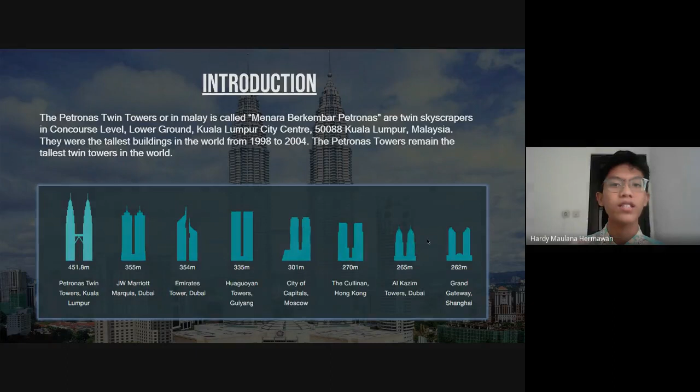Okay, next, milestone. The Petronas Tower started project planning in January 1992. Then in March 93, start of foundation work, and in April 94, construction of the superstructure. Fitting out the interiors complete with furniture in January 96, and in March 96, taking off the spires of Tower 1 and Tower 2.

January 97, moving in the first batch of Petronas personnel, and then the last, August 99, official opening by Dr. Mahathir Mohamad as Perdana Menteri of Malaysia.

Okay, for building Petronas Tower, many persons and many parts are included here. Companies involved, especially owner or developer KLCC Property Holdings Berhad, architect Cesar Pelli and Associates, structural engineer Thornton Tomasetti, MEP engineer WSP Flack and Kurtz, project manager Landis, main contractor Hazama Corporation for Tower 1 and Samsung Engineering for Tower 2, and many others like consultants, facade maintenance, fire and wind, then material supplier, construction hoist, elevator, facade maintenance equipment, paint or coating, sealants and steel.

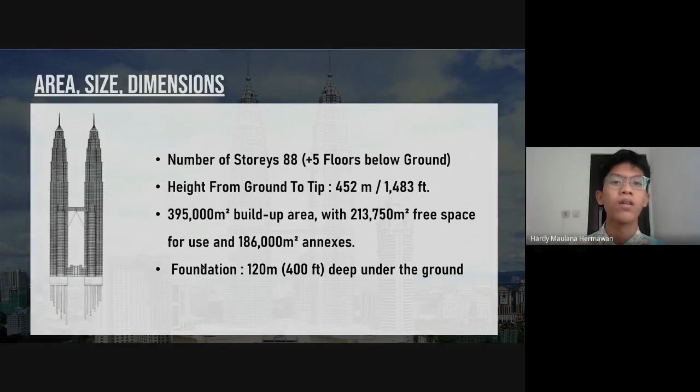Okay, next, why do we choose Petronas Twin Towers? The first reason is because the Petronas Twin Towers were once the tallest buildings in the world, from 98 to 2004, located in Southeast Asia, where most existing countries are developing countries. The reason number two is Petronas Towers have different contractors between Tower 1 and Tower 2.

Okay, next, for the structural system of Petronas Twin Towers, it will be presented by my partner, Garil Edo Hermans.

Okay, firstly, I will explain about the foundation structure. The geotechnical survey discovered that the actual construction site was situated partially over decayed limestone deposition and rest over soft rock. After discovering this, the structure was relocated to avoid the limestone deposition.

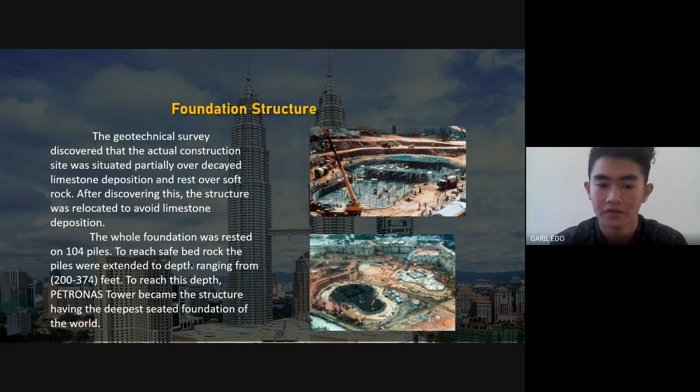The whole foundation was rested on 104 piles. To reach safe bedrock, the piles were extended to depths ranging from 200 to 374 feet. To reach this depth, Petronas Tower became the structure having the deepest foundation in the world.

And next, about foundation structure, in the picture we can see the foundation plan and foundation issue. The piles were embedded by a thick raft. This raft was 15 feet in depth and required an enormous amount of concrete to cast it.

This is about 4,470,000 cubic feet, which was the largest continuously poured concrete until 2007. This huge quantity of concreting for each tower required 54 hours to pour. Okay, next.

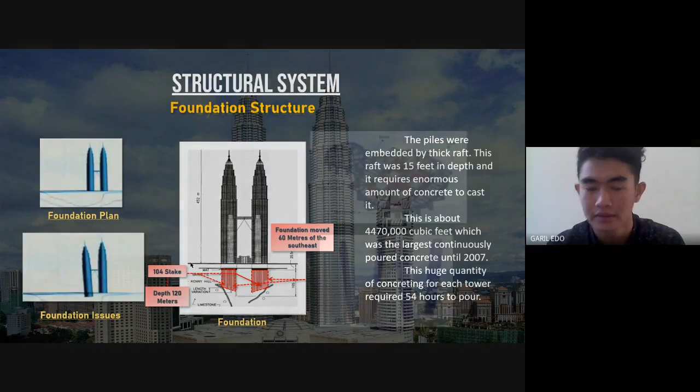The structural system of each tower comprises a 25 meter central core and an outer ring of widely spaced 16 cylindrical super columns. Beside the text we can see the picture: first we see the beam, bustle column, and underneath the main column and core.

The 16 cylindrical columns are constructed using high-strength reinforced concrete. These columns are linked by ring beams to build a moment frame tube. This is a good example of the tube-in-tube system, as there are a pair of tubes. The second image represents the tube-in-tube structure system for Petronas Tower, with the inner core and the outer tube shown separately.

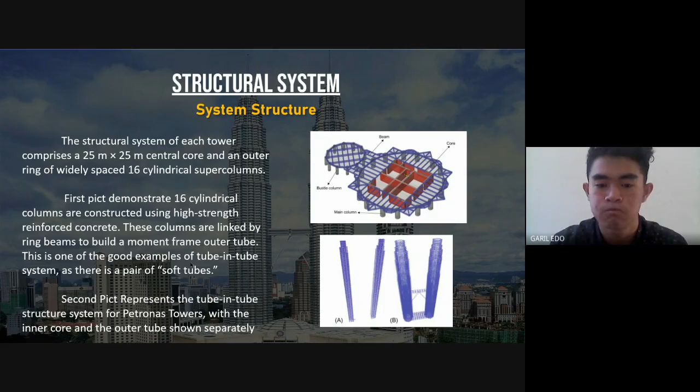Next, this is about the wall structure. You can see in the picture the reinforced concrete, aluminum composite panel, glass facade, and Rub Al-Hizb.

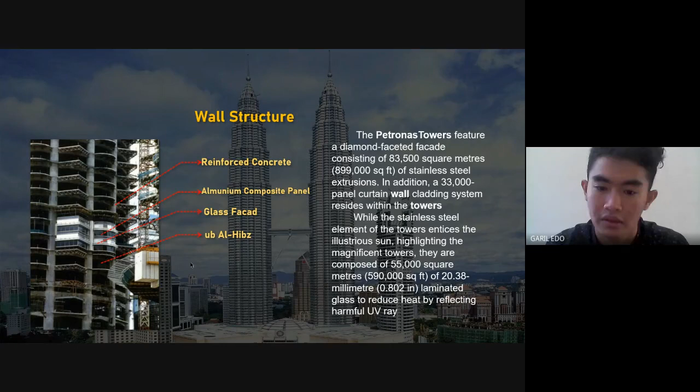The Petronas Towers feature a diamond facade consisting of 83,500 square meters of stainless steel extrusions. In addition, a 33,000 panel curtain wall cladding system resides within the tower, while the stainless steel elements of the tower entice the illustrious sun, highlighting the magnificent tower. They are composed of 55,000 square meters of 20.38 millimeters, or 0.802 inch, laminated glass to reduce heat by reflecting harmful UV rays.

We can also see the wall structure, the foundation Rub Al-Hizb, and then the additional shape combination shape. We can see the combination shape from gravity loads. Geometry is used as the main concept of the structural and design of the Petronas Twin Tower.

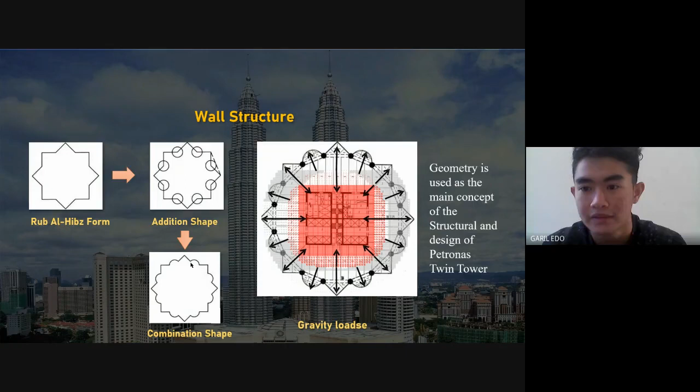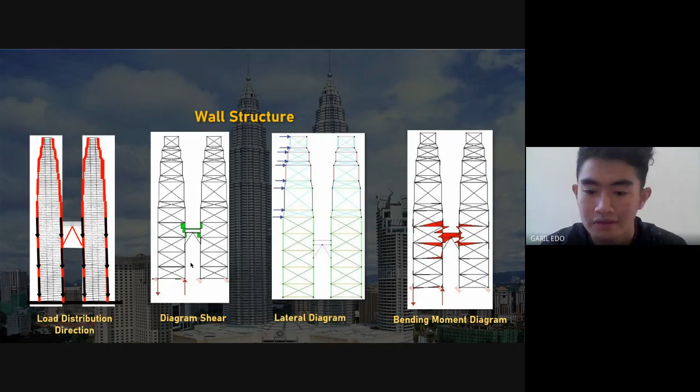At the sky bridge, the structural system is a double deck bridge spanning 58.4 meters, connected to the towers at the Sky Lobby Elevators Transfer Station. It is set on floors 41 and 42, allowing easy circulation by people in the upper tower floors, minimizing lift usage, reducing fire exit requirements, and given its height and span, requires steel for lightweight and easy construction.

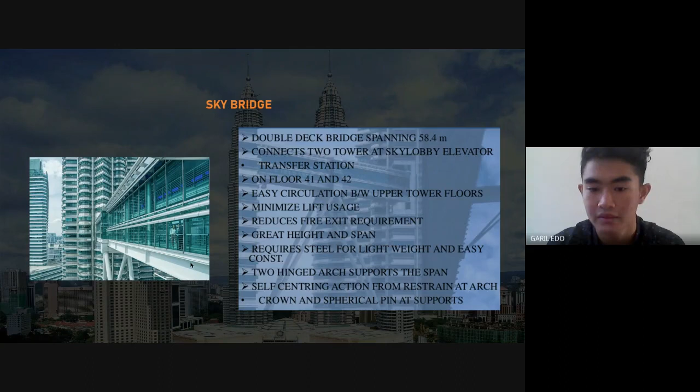At the center we can see the bearing tube, and at the foot a bright red 63-degree tilt, and at the very bottom of the foot, two steel tubes, located at floors 28 until 29.

The sky bridge connecting the two towers uses a combination of rectangle and triangle structures to add strength and stability to the bridge.

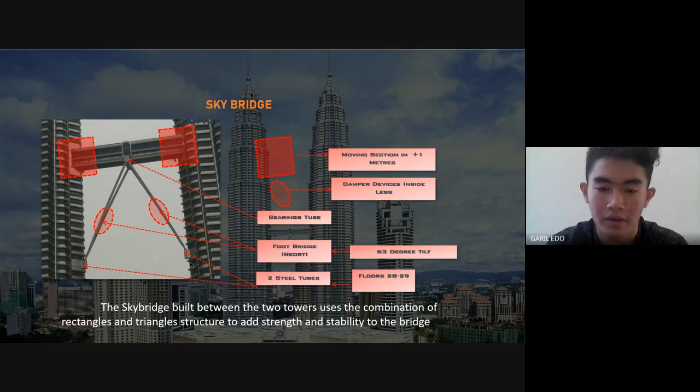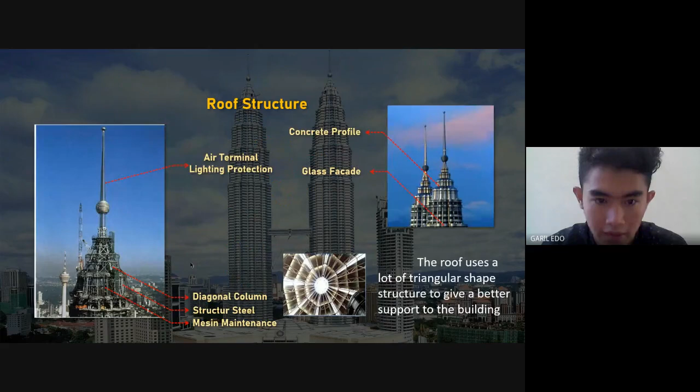Next, on the roof structure, at the pinnacle structure, the upper part of the Petronas Twin Towers, we can see first the air terminal lighting protection, then the diagonal column structured steel, and machine maintenance. In the second image: concrete profile, glass facade, and the roof uses a lot of triangular shaped structure to give better support to the building.

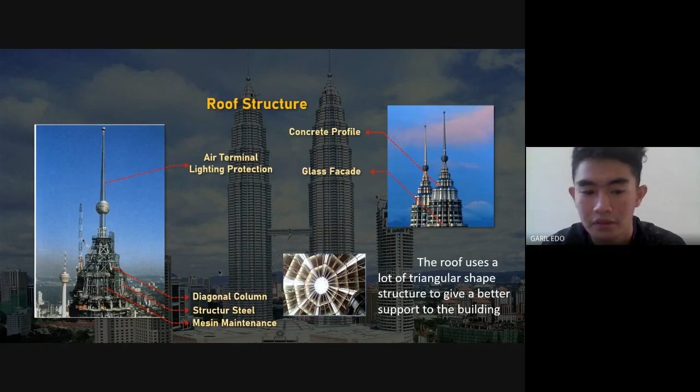Next, in the pinnacle structure analyzing and modeling: first, 3D modeling using SAP90; second, including perimeter beams, columns, central columns representing the core and outrigger system; and third, column cross section properties use compressive stresses dominant, elastic moduli E values varied with strength according to ACI 318, and the E value is not reduced for creep short term.

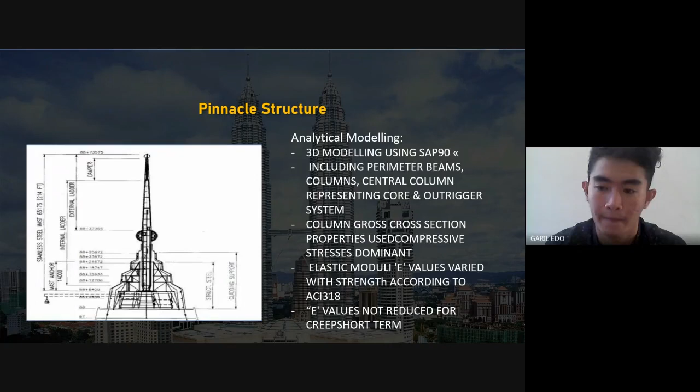Next, I will continue with project 3. My title is Substructure of the Petronas Twin Tower.

First, about soil and bedrock conditions. A generalized soil and bedrock profile below the tower is shown in Figure 1. The geological profile consists of 12 to 20 meters of medium-dense, silty and clay alluvial sand. The alluvium is underlain by medium-dense to extremely dense, sandy and gravelly silt and clay materials.

This residual soil and weathered rock deposit now locally forms the Kenny Hill Formation. The bedrock below the Kenny Hill is of Silurian age and consists mainly of calcitic and dolomitic limestone and marble. The rock surface is very irregular and has been weathered by solution activity, creating numerous joints and cavities.

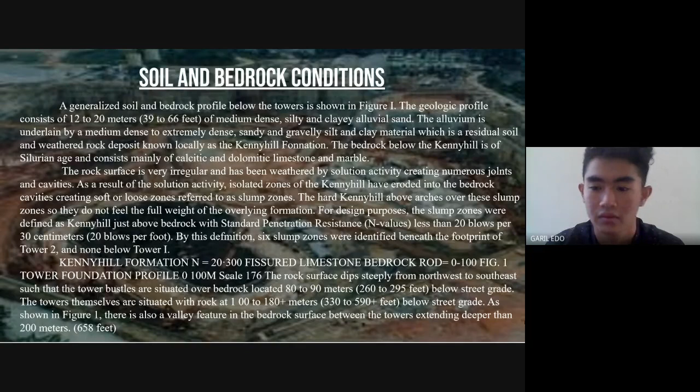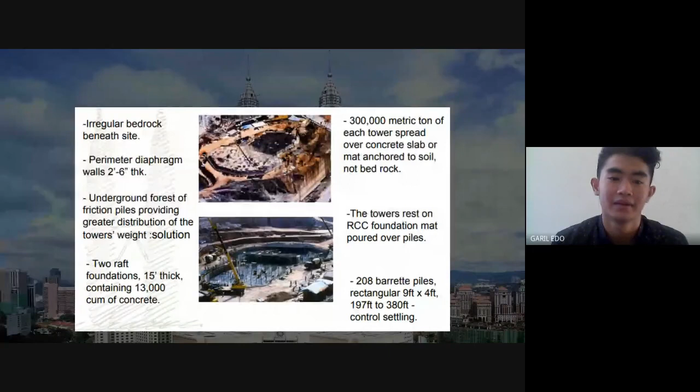There are 300,000 metric tons of the towers spread over a concrete slab, anchored to soil, not bedrock. The towers rest on RCC foundation mats poured over piles.

208 barrette piles, rectangular, 9 feet by 4 feet, and 197 to 380 feet, control settling.

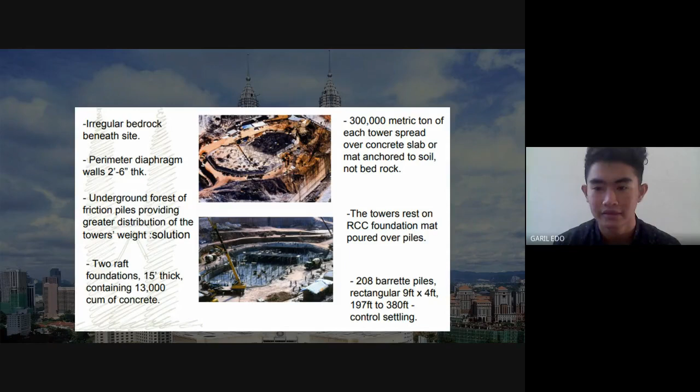About foundation requirements. Due to the height, slenderness, and structural interconnection of the towers, the developer and the designer aimed for a differential settlement as close to zero as practical.

With the anticipated geology and the goal of minimizing differential settlement, foundation alternatives include a floating raft, a system of bored piles socketed into limestone below any significant cavities, and a raft on friction piles located in the Kenny Hill formation above limestone, with pile lengths varied to minimize differential settlement.

The large size and great strength and stiffness requirements preclude the use of the floating raft. The great depth to the bedrock made bored piles impractical. Therefore, the friction pile scheme was used.

During the preliminary design and soil exploration phase, it was found that the bedrock elevation at the initial tower location varied so greatly that rock actually protruded into the proposed basement on one side of the tower. This made control of differential settlement impractical.

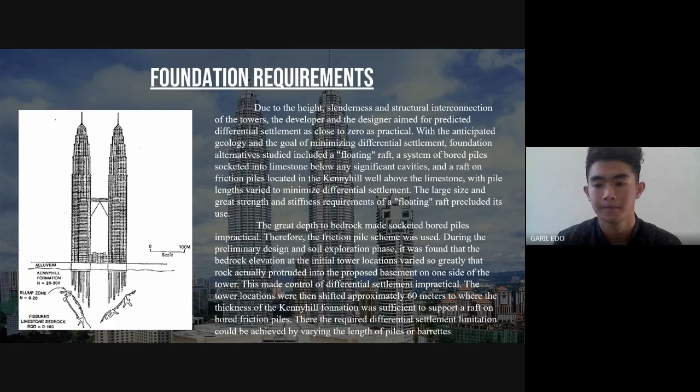On the exploration requirements, the exploration program consisted of more than 200 borings and 200 probes on 8 meters, in addition to 260 in situ pressuremeter tests and two fully instrumented

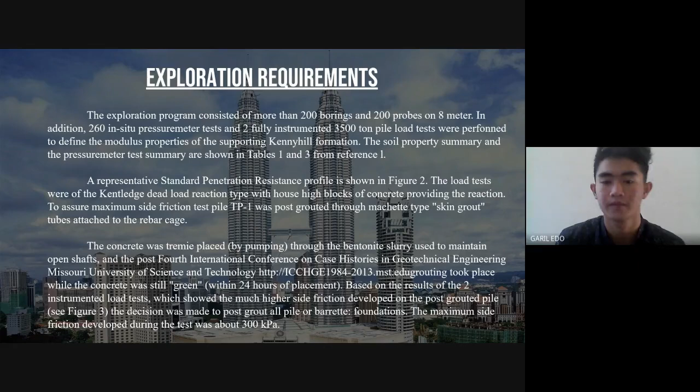3,500-ton pile load tests were performed to define the modulus properties of the supporting Kenny Hill formation. The soil properties summary and the pressuremeter test summary are shown in Tables 1 and Table 3 from Reference 1.

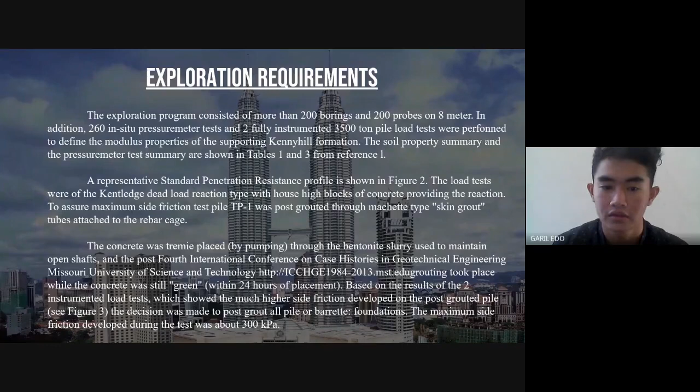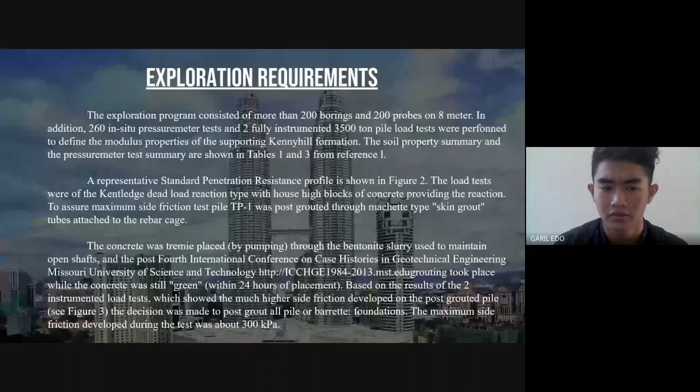A representative standard penetration resistance profile is shown in Figure 2. The load tests were of the kentledge load reaction type, with high blocks of concrete providing the reaction to assure maximum side friction. The pile TP1 was post grouted through machette type skin grout tubes attached to the rebar cage.

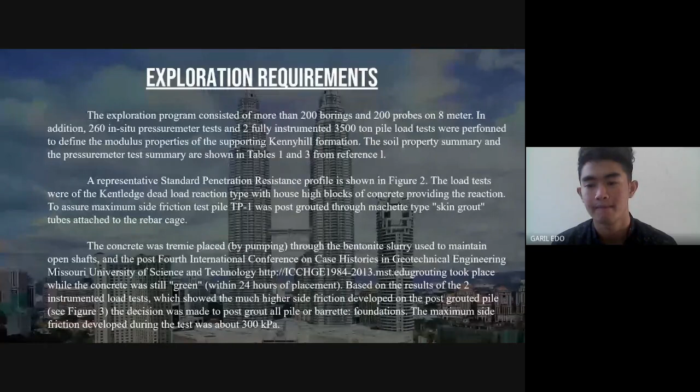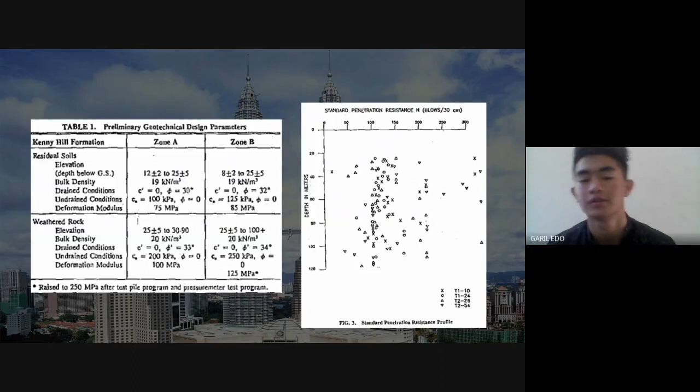Next, this is about the settlement analysis and assumptions.

Extensive settlement analyses were performed utilizing the SAP90 program and the Plaxis axisymmetric program, using soil modulus estimated based on back calculation for the test pile program and from averaging the rebound modulus slope of the in situ pressuremeter tests. Pile lengths were varied until the calculated maximum differential settlement goals were achieved, based on bearing capacity consideration only.

Barrette lengths of 33 meters would have been sufficient to support the design loads, but pile lengths under the main towers varied from 40 meters to 105 meters based on settlement consideration.

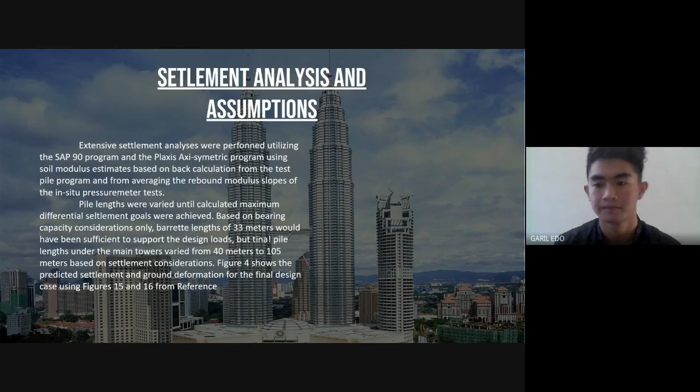Figure 4 shows the predicted settlement and ground deformation for the final design. The case uses Figures 15 and 16 from the reference.

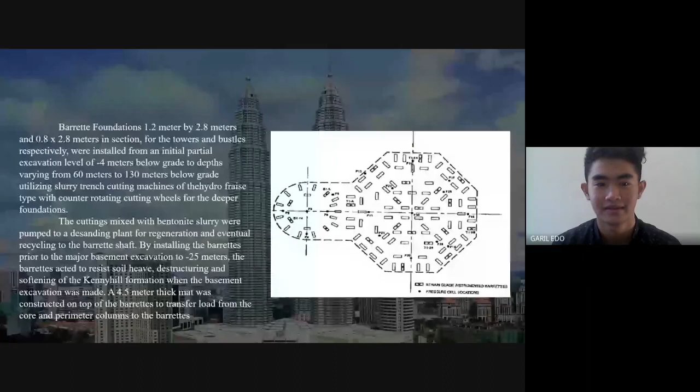This is the Barrette's Foundation, 1.2 meters by 2.8 meters, and 0.8 by 2.8 meters, in sections for the towers and bustles. These were installed for the initial partial excavation level at minus 4 meters below grade, to depths varying from 60 meters to 130 meters below grade, utilizing a slurry trench cutting machine of the hydrofraise type with counter-rotating cutting wheels for the deeper foundations. The cutting mix with bentonite slurry was pumped to a desanding plant for regeneration and eventual recycling to the barrette shaft by installing the barrette prior to the major basement.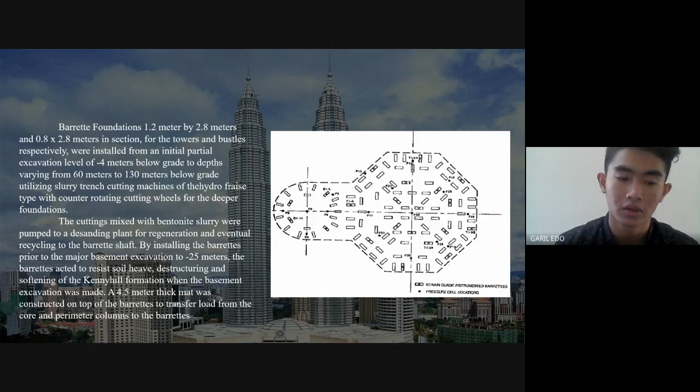Excavation to minus 25 meters. The barrette acts to resist soil heave, destructuring and softening of the Kenny Hill Formation, when the basement excavation was made. A 4.5-meter thick mat was constructed on top of the barrette to transfer load from the core and perimeter columns to the barrette.

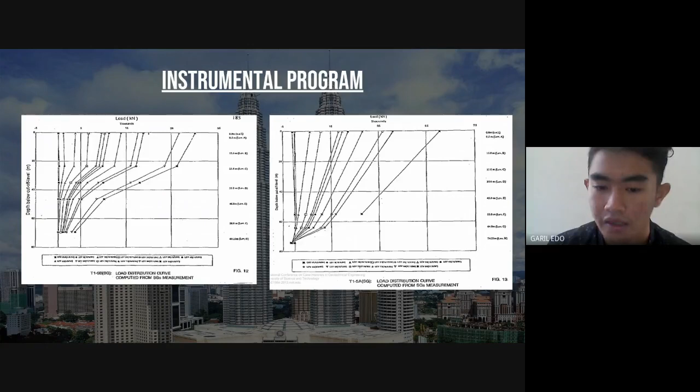The instrumentation program: this is the load distribution curve computed from SGS measurement, and the second represents the T1-5A (SG).

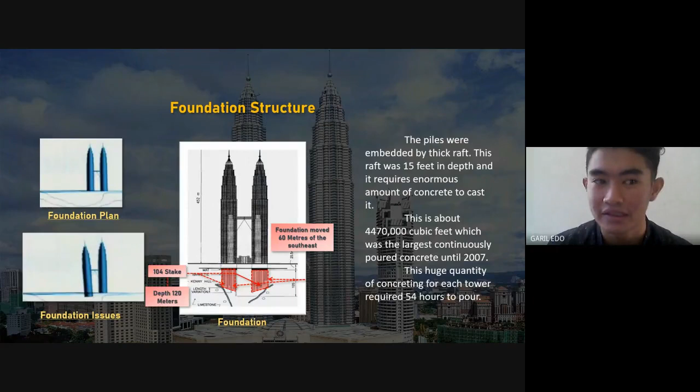It's the same as the slide before. For the foundation structure, the data available from the instrumentation program for both towers is immense and will be studied and reported in due time by the local geotechnical engineers. The selective data represented here for Tower 1 provides a preliminary picture of the general results. A very high percent of the installed instrumentation worked consistently throughout the construction.

The data overlay on the strain gauge reading is complete through early spring 1997, when the full load of the building was in place. The pressure cell information is only available through construction up to about the 35th level, with less than half the full building loads in place.

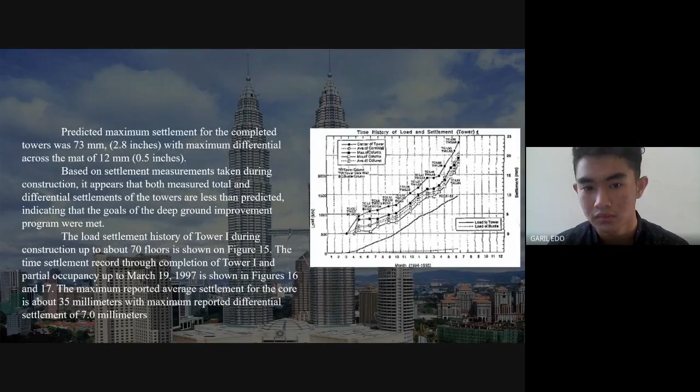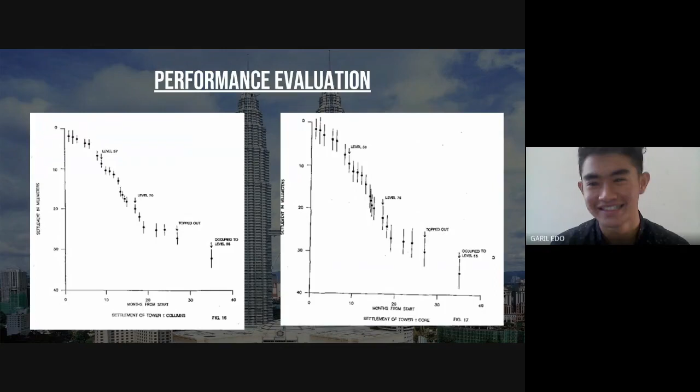For the performance evaluation, the predicted maximum settlement for the complete tower was 73 millimeters, with maximum differential across the mat of 12 millimeters. Based on the settlement measurements taken during construction, it appears that both measured total and differential settlement of the tower are less than predicted, indicating that the goals of the deep ground improvement program were met.

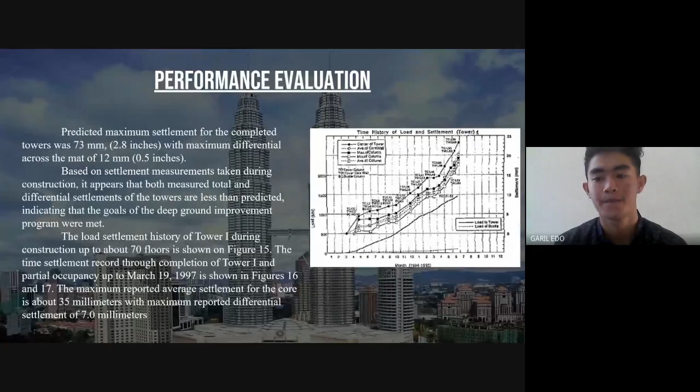It should be noted that the reported differential settlement is suspect, since the major portion was reported immediately after pouring the concrete mat, before significant additional load had been applied. The level of reading reliability may be on the order of 2 to 3 millimeters.

The strain gauge data from the barrette indicates considerable variation in how the load is transferred down the barrette, indicating the variable nature of the Kenny Hill Formation. In some of the barrettes, all the load is transferred in friction with no load reaching the tip or lowest strain gauge level. However, in other barrettes, significant load reaches the tip, even when the barrette is as long as 75 meters.

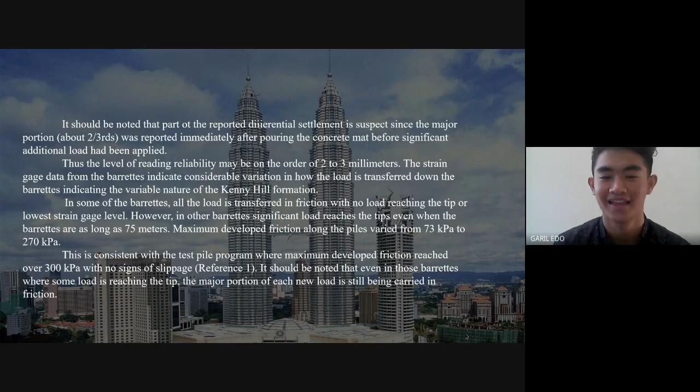Maximum developed friction along the pile varied from 73 kilopascal to 270 kPa. This is consistent with the test pile program, where maximum developed friction reached over 300 kPa with no signs of slippage. It should be noted that even in those barrettes where some load is reaching the tip, the major portion of each new load is still being carried in friction.

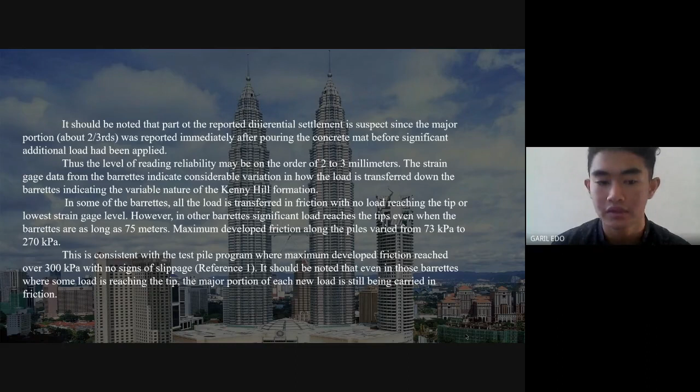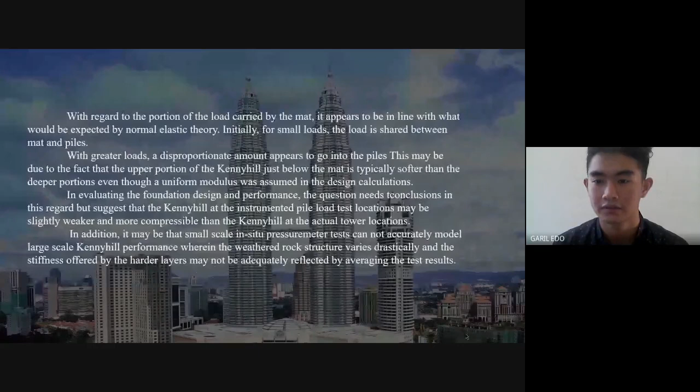I think that's enough for me, and then we'll continue with my partner, Hardy.

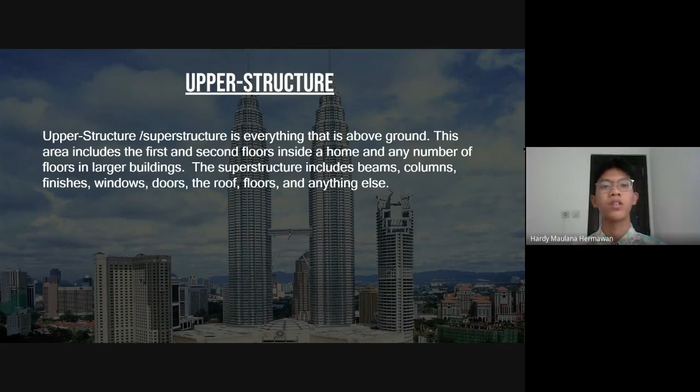I will explain about the upper structure of Petronas Twin Towers. The superstructure is everything that is above ground. This area includes the first and second floors inside, and any number of floors in larger buildings. The superstructure includes beams, columns, finishes, windows, doors, a roof, floors, and anything else.

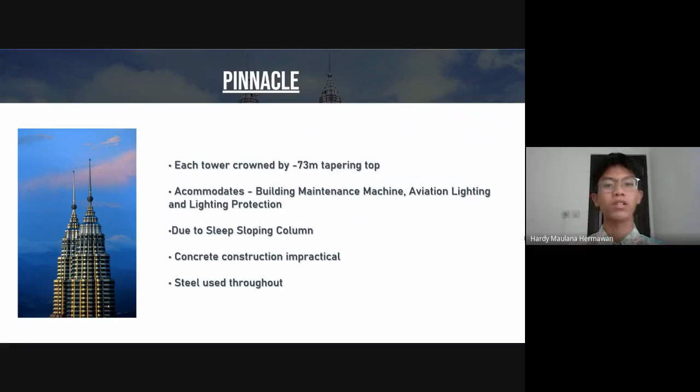The pinnacle, the tower crown, at a 73-meter tapering top, accommodates building maintenance machinery, aviation lighting, and lightning protection. Due to the steep sloping columns, concrete construction impractical and steel is used throughout.

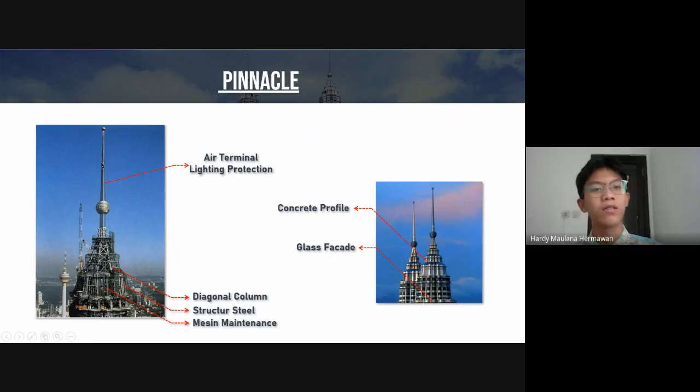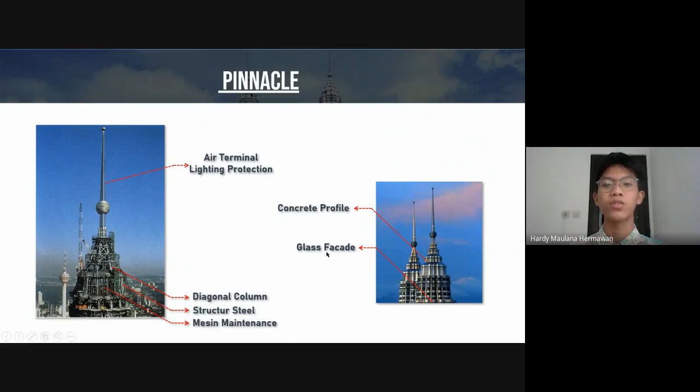The pinnacle: like my partner's explanation, this is the air terminal lightning protection, and this is the diagonal column, and this structure is formed by steel, and inside here there is machine maintenance. This structure uses concrete profile, and this structure uses glass facade. And this is the MEP, a picture of the pinnacle elevation.

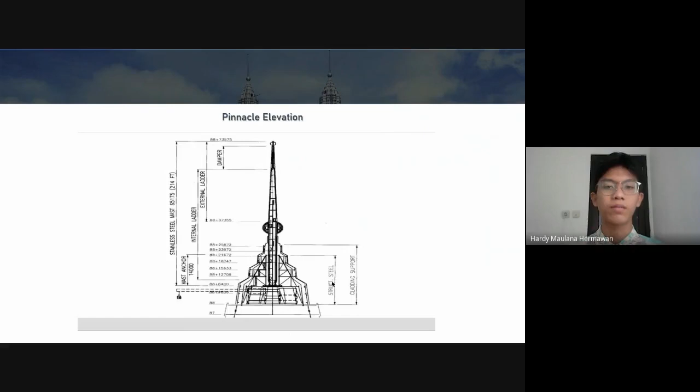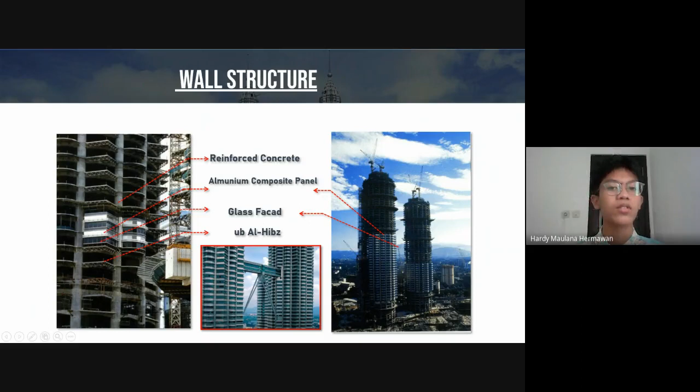Okay, next for the floor. The floor planning design was originated from the ancient Islamic forms of eight-pointed stars and decorative motifs. When viewed in plan, the towers appear as rows of overlapping squares interlocking heaven and earth to create an eight-pointed star, which is further refined with half circles between the star points.

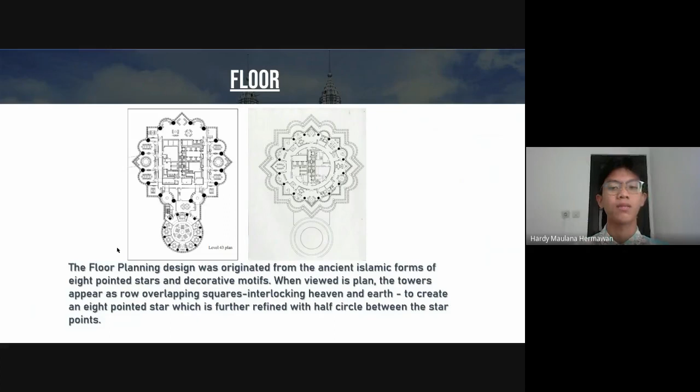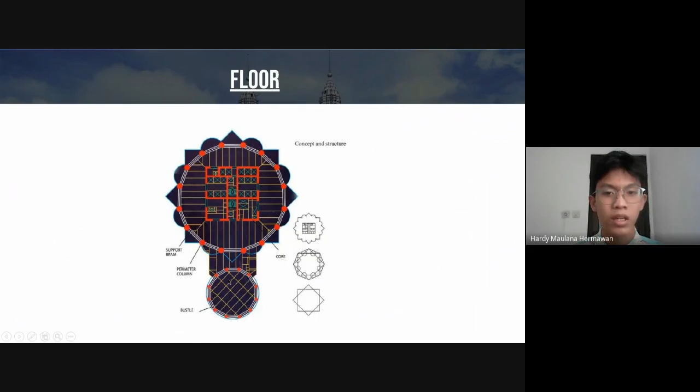This is the concept and structure: the support beam, perimeter column, bustle, and the core. Column cast in reusable steel forms, finely finished columns open to view at most of the floor.

Concrete varied from M80 to M30 in three steps. 12 bustle columns, 1.4 meter to 1 meter. Setbacks at 60, 73 and 82, sloping columns over 3-story heights above floor 84, steel columns used to avoid complication.

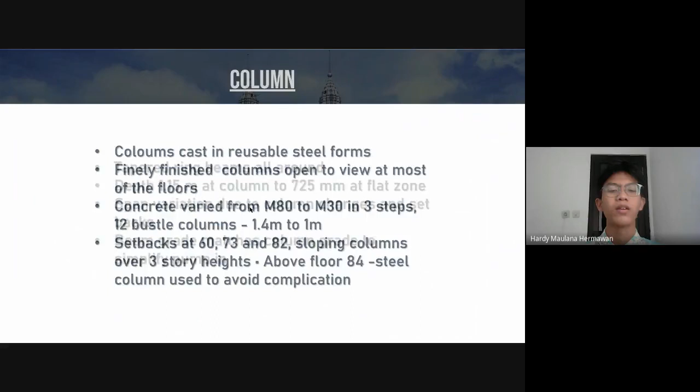Beams: tapered ring beams all around, depth 1.15 meter at column to 725 millimeter at flat zone, span variation due to column change and setbacks. Beam grade meets column grade to simplify pumping.

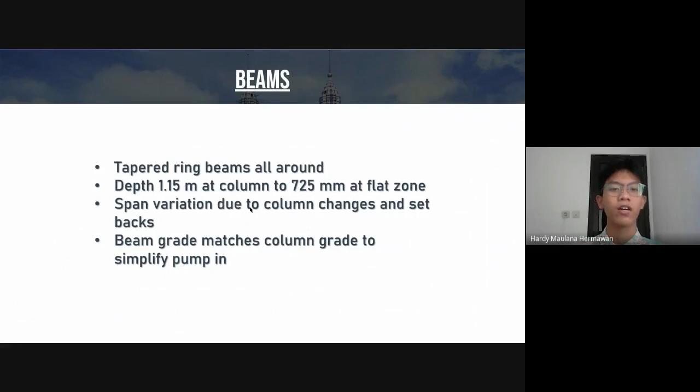Okay, next is the bridge structure. Engineering design of the structural system selected utilizes a two-hinge arch, springing from supports at level 29 and rising at 63 degrees to support a pair of parallel two-span continuous bridge girders at level 41.

The structure of the two-level bridge is conventional framing constructed of structural steel, with beams moment-connected to columns which bear on the level 41 continuous girders.

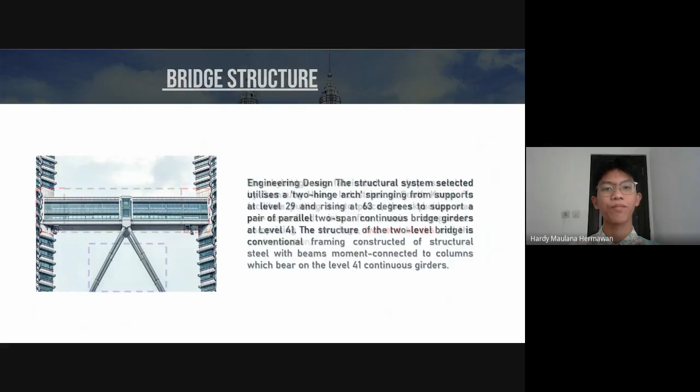The Sky Bridge was fabricated and shop assembled by Samsung Heavy Industries of South Korea to facilitate putting it into place. The Sky Bridge was pre-assembled into five main components, comprising the two legs, two end blocks, and the center section.

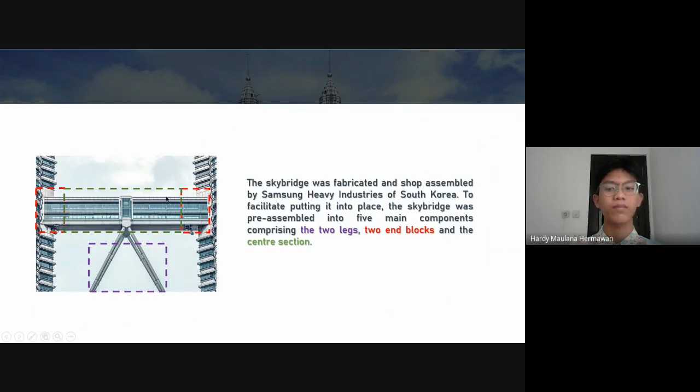For bringing the Sky Bridge up, there are 9 steps. Step 1: the sky bridge legs are lifted up one at a time by tower cranes. Once they are in position, control cables are used to lower them over their permanent bearings at level 29. For your information, the crane is placed in tower 2.

Step 2: the two end block girder frames of the skybridge are lifted individually. The blocks are installed about 100 millimeters above their final position at level 41. They are also retracted about 100 millimeters into the tower to provide sufficient clearance for the skybridge center section during lift.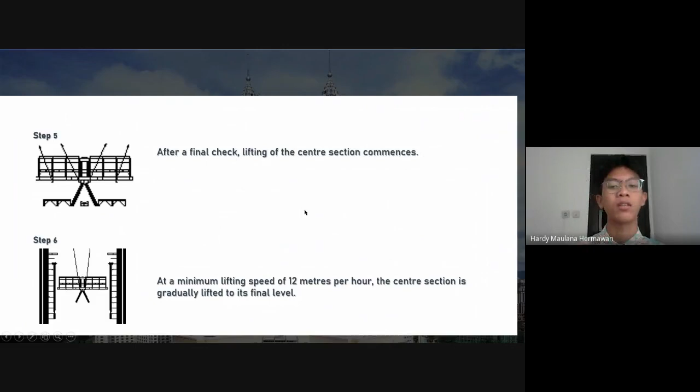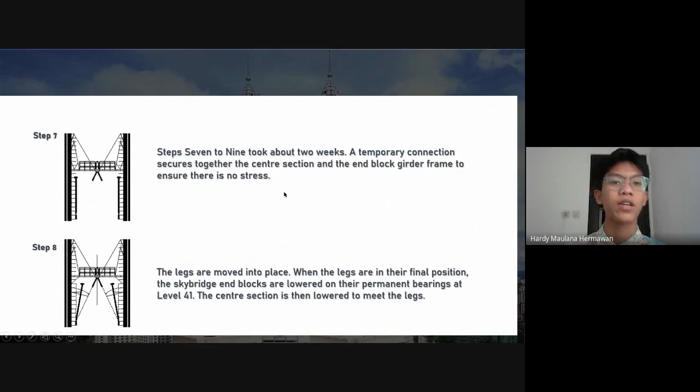Step 7. Steps 7 to 9 took about 2 weeks. A temporary connection secures together the center section and the end block girder frame to ensure there is no stress.

The legs are moved into place. When the legs are in their final position, the sky bridge end blocks are lowered onto their permanent bearing at level 41. The center section is then lowered to meet the legs, bringing it down to connect with the two legs.

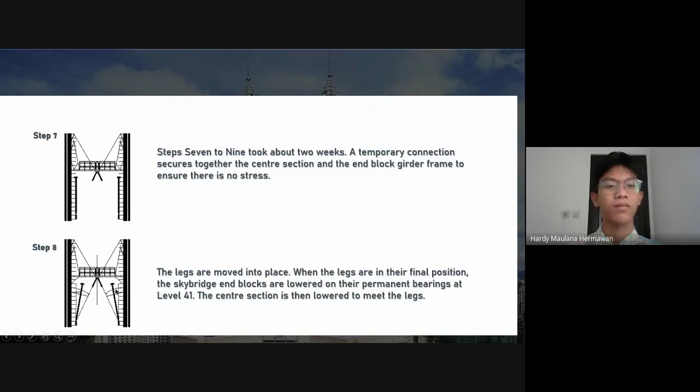At about 7:40 p.m. on 9 August 1995, after 32 hours of lifting operation, the skybridge was lifted to its final position at the 41st and 42nd floor of the Petronas Twin Tower.